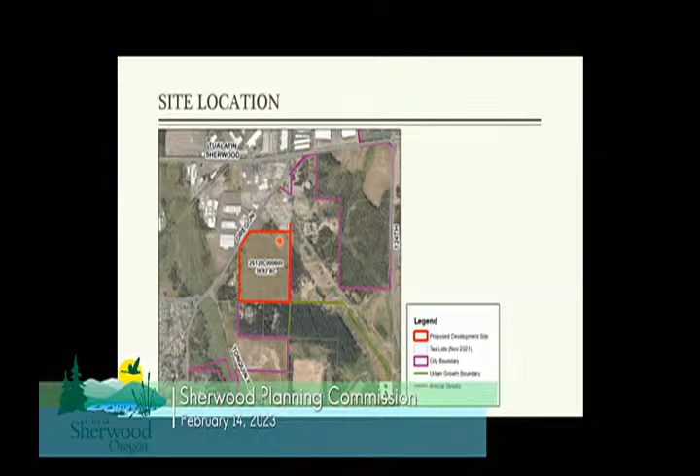Just as a reminder of where the site is, this is an approximately 38-acre site on the south side of Oregon Street in the city's Tonquin employment area, and the property is zoned employment industrial.

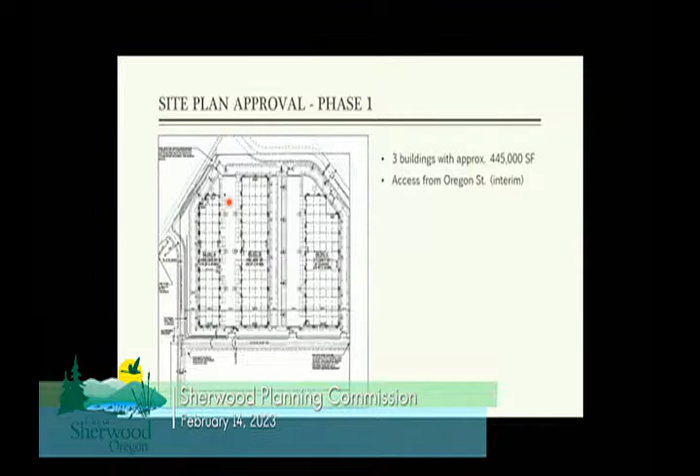This site has received land use approval and a few different modifications, and what you have in front of you this evening is an additional modification specifically related to a few conditions of approval. So what has been approved, the site plan is shown here. Oregon Street is at this corner of the property, and what's been approved is 3 buildings for approximately 445,000 square feet of light industrial, or what we call employment industrial, uses.

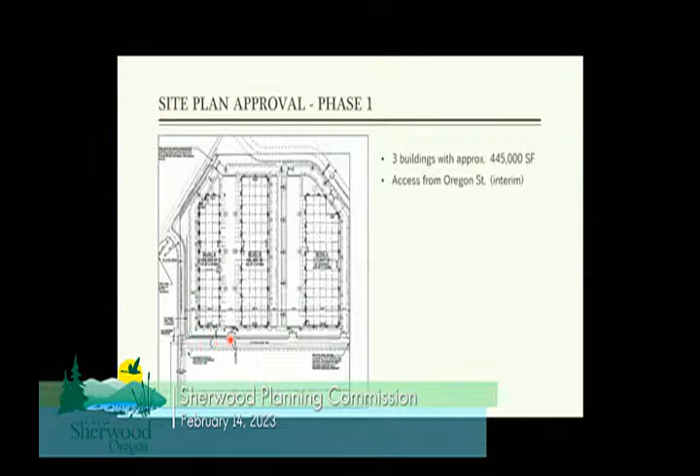The modifications that we have approved involve the alignment and future construction of Tonquin Court on the side of the property here, and then also what we're calling the east-west road to the south of phase 1. Eventually that road will connect up to Ice Age Drive here.

So really good from a staff perspective, and hopefully from a planning commission perspective as well, we're finally getting through the details here and getting pretty close to finalizing the plans. The site's been graded, and building permits are very close to being issued, likely next month in March.

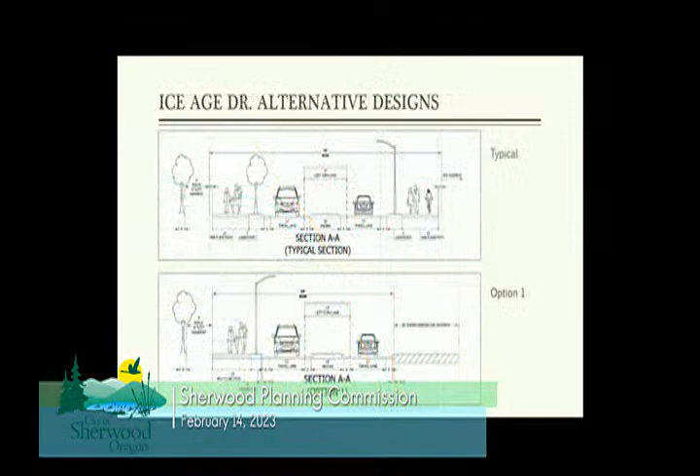We want to be very mindful of what the future road cross-section will actually look like, understanding that a portion of it will likely be dedicated back to Kinder Morgan as an easement. As part of the application and staff report, we've shown the best and worst case scenarios. The best case scenario is a continuation of the design along the rest of the Ice Age Drive road, a 12-foot section.

We're really just looking at this north section where the future easement would be located. In the best case scenario, that's a 12-foot multi-use path, 5-foot landscape strip with shrubs, no trees, and lighting on that one side. The worst case scenario is where Kinder Morgan would say you can't put anything over our easement, and it would just need to be low-lying vegetation.

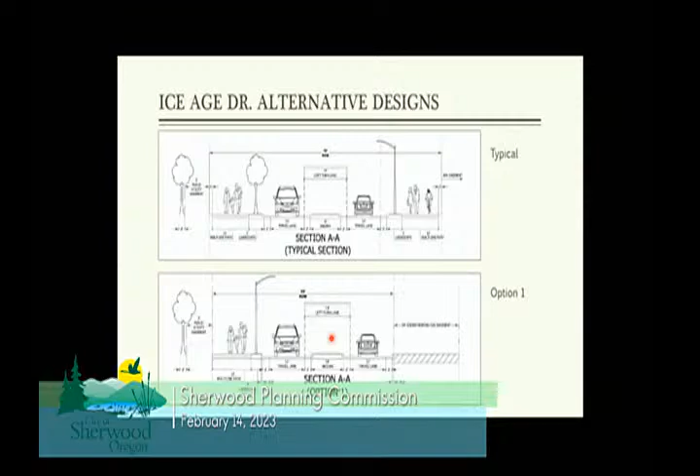In that case, we wanted to make sure through this process that we could get a complete road pavement section in. So you can see in all of the alternatives that we have, the road pavement section is the same: 2 travel lanes, either a median section or a turn lane in the middle. It's likely for some of this it'll be landscaped, so this median is not shown here, but it's likely that

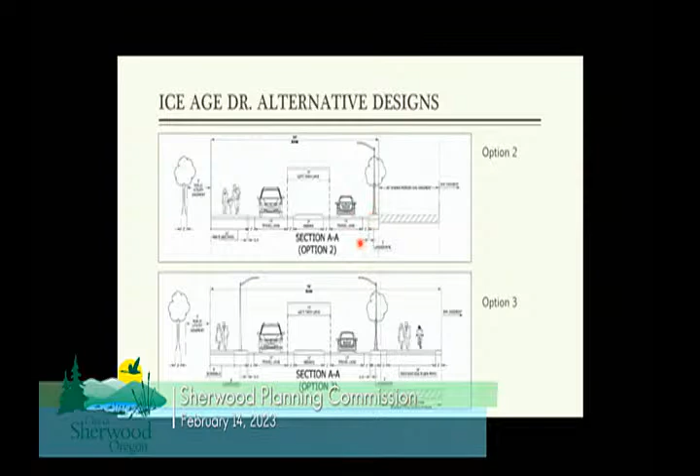this would be landscaped for a portion where it's appropriate given the sight distance and turn lanes. And then we have a few other options just to show that there's a lot of different possibilities here. So trees on this side to even out the landscaping on each side. And then in this scenario, a 16-foot multi-use path, reducing this one down to 8 feet, again just to show different options for the street cross-section design.

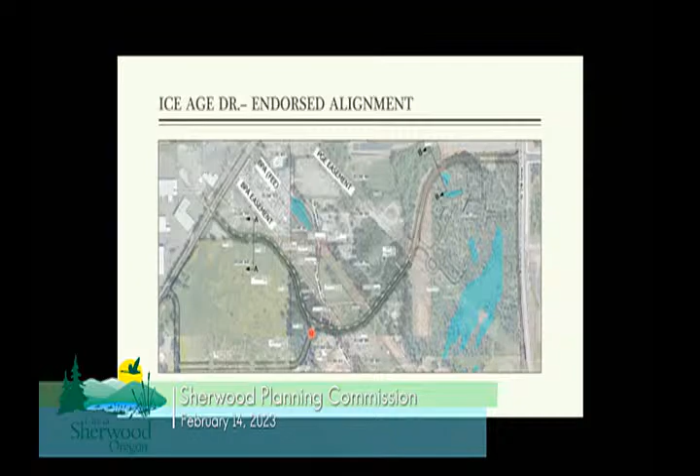and relocation of the line as part of our larger Ice Age Drive project. And the main reason that makes sense is because Kinder Morgan and that line is going to impact not just this portion of the roadway. The Kinder Morgan line continues off-site and is going to impact this portion of the roadway as well, and also this connector road. So instead of going through 2 different applications, one from the applicant, one from the city, it just makes sense for the city to take the lead on that.

But the intent here is to give the applicant certainty on the roadway alignment, which is good that the URA board just endorsed that alignment. So give the applicant certainty that the right-of-way location is not going to change so that they can move forward with building permits. Give them certainty that they're not going to have to get any type of approval from Kinder Morgan, which would again result in delays, clarifying that the city will take on that role.

And then from the city side, we wanted to make sure that we got the property in the correct manner, being through the correct type of deed, so that we could right away start working with Kinder Morgan on the relocation, and then making sure that we get the property in a short amount of time so that we can actually get those agreements done with Kinder Morgan and actually get the road built. So those are the goals. Happy to answer any specific questions, but a lot of attorneys looking at this over the last few weeks, so we can answer any questions.

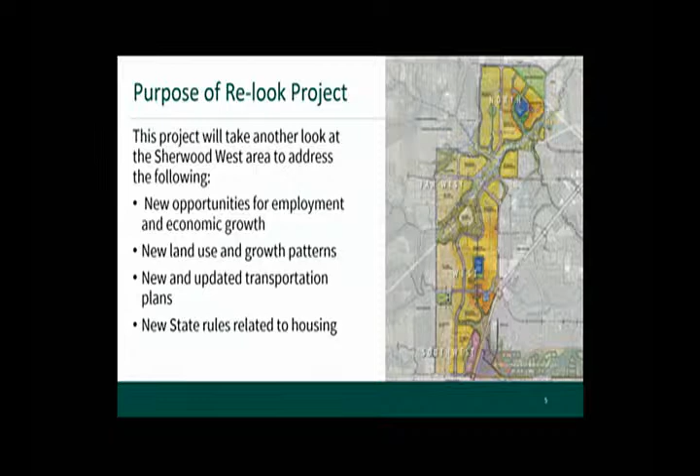So we kicked off this project in 2021, and it's almost been a 2-year project. We really were hoping to wrap up this project last fall, but I think the CAC had some important questions that we delved into over the past couple of months, and we really wanted to answer those questions and do a deep dive and make everybody feel comfortable with where we were going, as well as doing some extra outreach to our community.

So about Sherwood West, it's about almost 1,300 acres. There's 126 properties with 110 property owners, and the average size is around 9.8 acres. To the south it's bounded by Chapman, to the north, Sherwood Road, and Elwert kind of goes north-south.

So work and analysis to date. We've done a lot of work over the past 2 years. We set up a new vision, or reworked the vision for Sherwood West. We set up some goals and evaluation criteria for the plan document. We did a public engagement plan and how we were going to engage the public. We looked at the economic opportunities and challenges within Sherwood West itself.

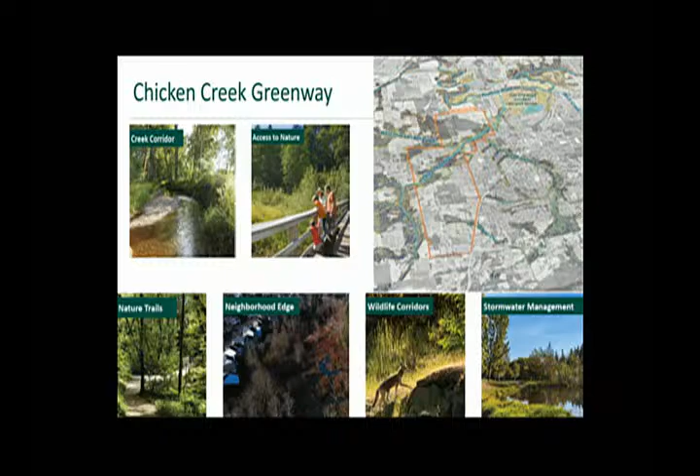Active transportation - we wanted to make sure, and in a couple more slides we'll talk about more of the active transportation and trail system. We really want to make sure that our destinations in Sherwood West are connected to current destinations within Sherwood or just outside of Sherwood.

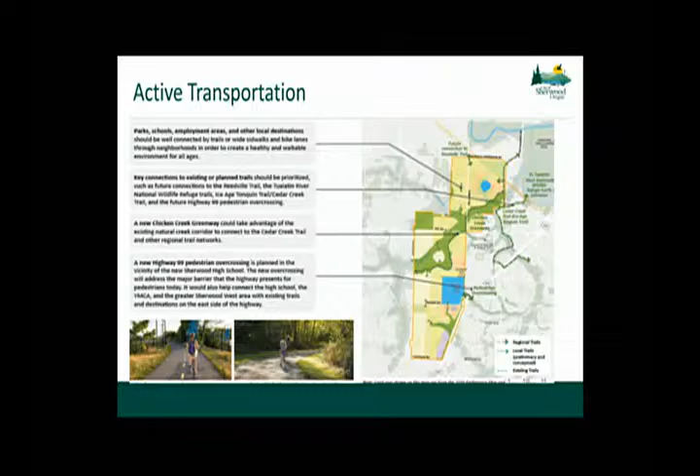So we want to make sure we have trails linking up with the refuge, and that we are linking to the Cedar Creek trail system as well. We really want to take advantage of that new Chicken Creek Greenway. And then, of course, we have the new Highway 99 pedestrian crossing too, which is in the works.

Great neighborhoods - so again, we want to plan for walkability, and we want to plan for a variety of housing. Within the plan itself, and I'm going to get to these land use concepts in a couple more slides, but the CAC has been really innovative in how they're treating middle housing and middle housing concepts.

They have developed a middle housing zone that solely focuses on middle housing, so that could be anything from duplexes to quadplexes. And then they have also set up a new land use designation just strictly for cottage clusters.

That will allow the community to develop some different standards - different regulations within our development code around that middle housing - that doesn't have to be the same as House Bill 2001 and what it states in state statute.

So we can zone middle housing and have it confined to that? I thought House Bill 2001 said you have to allow anything in any zoning - it doesn't confine single family. Right, it doesn't confine it. So how would they envision middle housing if you can't control what developers want to apply for? So it doesn't confine middle housing.

So meetings 6 through 11, I'm telling you, we've done lots of work here. We did a buildable lands inventory for Sherwood West. We took out all of the constraints and we really wanted to see how many buildable acres we were looking at in Sherwood West, so we could look at how many acres of employment versus how many acres of residential land needs there could be. That kind of really helped us out with our housing metrics assumptions as well.

So we did some scenario planning and concepts with the CAC. We looked at the housing metrics, and at the very end here we'll talk about those housing metrics, but we looked at the implications of middle housing within Sherwood West, and we looked at, okay, if Sherwood West develops with 10% middle housing, what would the density be, and 15%, and 20, and so on.

We looked at a proposed north-south connector road, because there was some conversation about needing another north-south connector road other than Elwert within the plan area. And then we took a look at the jobs to housing analysis and the balance of jobs to housing. Once again, in my last slide here, we're going to talk about that metrics and what that looks like.

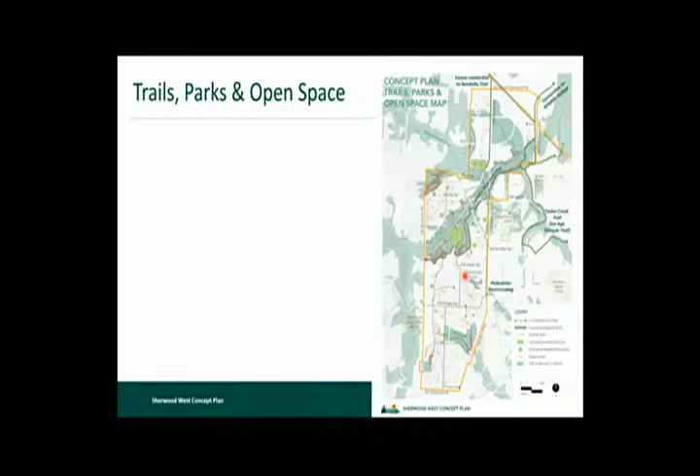So we have our street connectivity map, and actually I'm going to fast forward here because I think I have some better slides that talk about the conceptual transportation system. We show here our existing streets in the bold color, and then our future conceptual transportation concept plan map on the right, which shows proposed future streets, and then streets for further study.

In speaking with the CAC about our transportation options, in 2016 we had two different concepts for Elwert Road. We had Elwert Road in its current alignment, and then we showed Elwert Road rerouted.

Vacated, with two roundabouts, and we have shown those two concepts again within this plan. If Elwert is rerouted, we need to study that area a little bit more, but that is the preferred option of the CAC at this moment in time, to reroute Elwert to help slow it down.

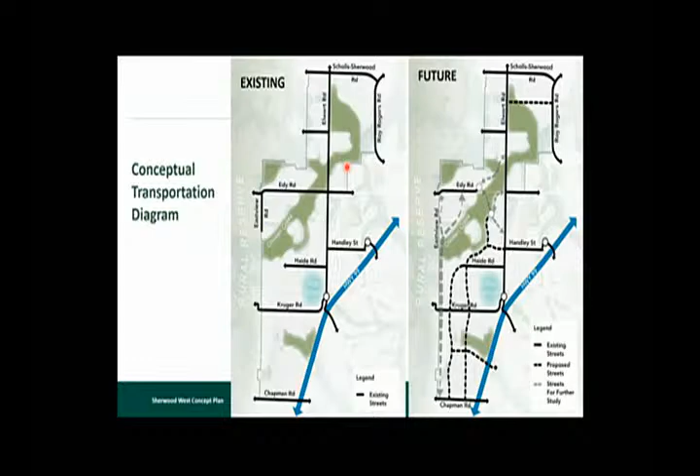So our key ideas here for transportation: Southwest Elwert realignment requires some additional study, and so does that north-south connector route. Right now, we've just identified it as conceptual.

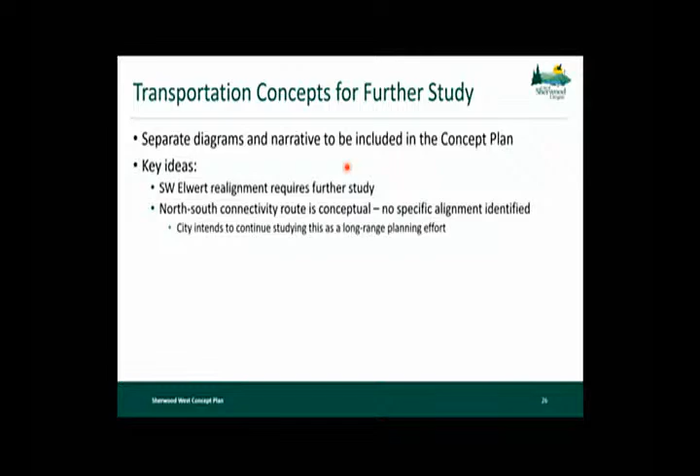So the streets in Sherwood West will all be upgraded to comply with city urban standards. Selected roadways will have one travel lane in each direction with center turn lanes. We're looking at Sherwood Road, Elwert Road, Edy Road east of Elwert, and Chapman.

We know that the pedestrian overcrossing near Sunset is planned. And then we have a grade separated crossing, we've looked at another kind of grade separated crossing just north of Chapman between the Brookman area and the Sherwood West area as well.

Why there versus further north? I guess just because that's where it touches more of the city, less developed. Yeah, I guess that's a good point. No, I like it, because I know there's discussion around something potentially at Cedar Creek. Yes. But I don't know how likely. I know that's separate from this, and I don't know how likely any of that is.

So this could be another grade separated crossing down to the south that would connect Brookman and the Sherwood West areas. What that would look like, I don't know. It could be an overcrossing or an undercrossing at this point.

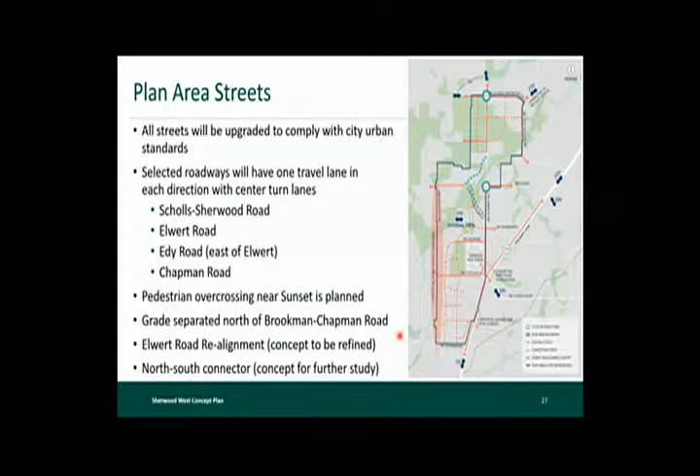So we did a transportation impact analysis, and you can actually find all of this information online within our CAC packets. Our recommendations are to adopt a design concept for Elwert Road for a 3-lane arterial with bike lanes and sidewalks. We want to further study the realignment of Elwert Road to pick the best route and layout in that area.

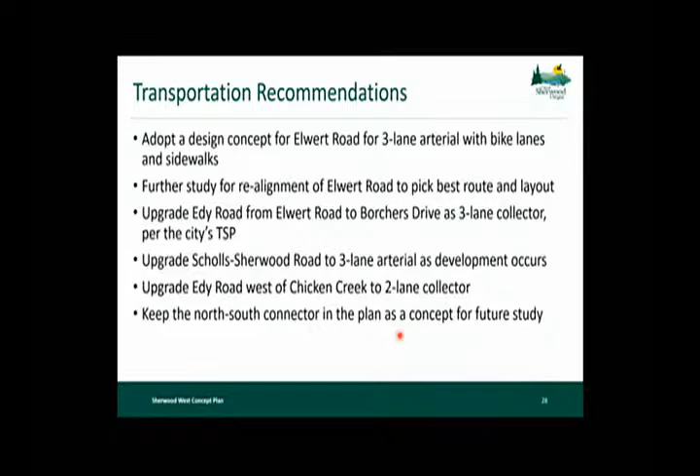Upgrade Edy Road from Elwert Road to Borchers Drive as a 3-lane collector per our current TSP. Upgrade Edy Road west of Chicken Creek to a 2-lane collector, and really keep that north-south connector in the plan as a concept so we can study it further here in the future to ensure whether or not it makes the most sense.